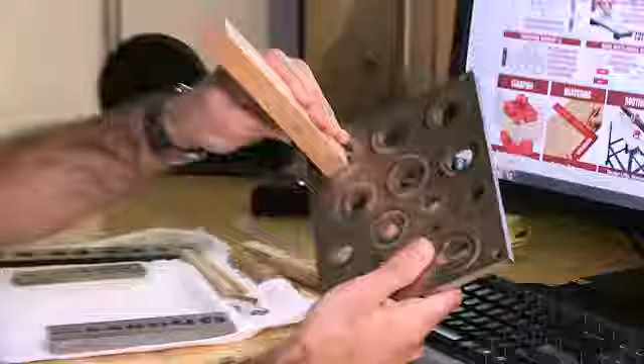So we set out to make a dowel maker. We first started off with a plate like this, to where you could start really big and work your way down to the sizes. But it's pretty difficult, you kind of need a press for that.

Mike is a great mastermind, he envisions what it should look like. So this is the first design so far, first prototype. That's kind of where we're at right now.

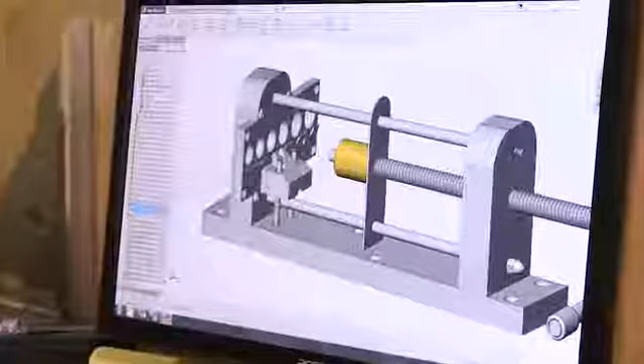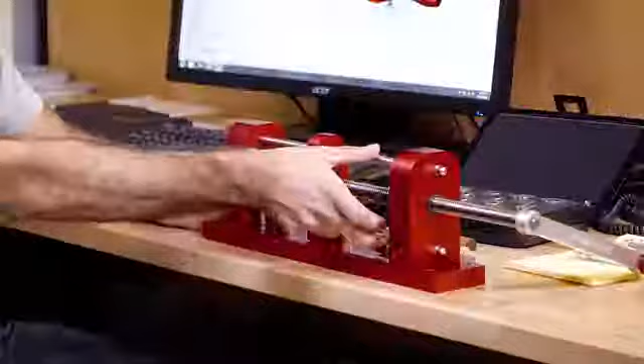I first started drafting the overall shape and geometry of the dowel press in SolidWorks. I started off with the Acme rod and eventually realized that I needed a way to stabilize it, which is where the guide rods came into play. They actually serve two purposes: holding the tension between the dowel getting pushed through the slug, and serving as a guide for the Acme rod while keeping it centered.

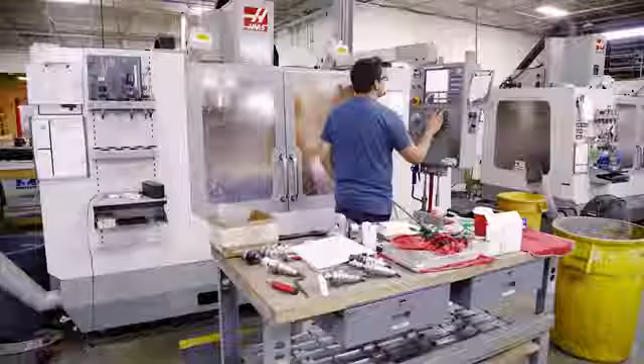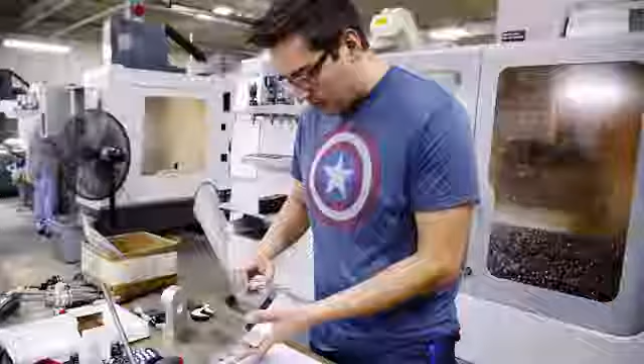So our machinist has got a couple parts done already. As you can see, these are beefy, really really hefty. You can have your Acme rod that goes through here, and that's about all we have so far.

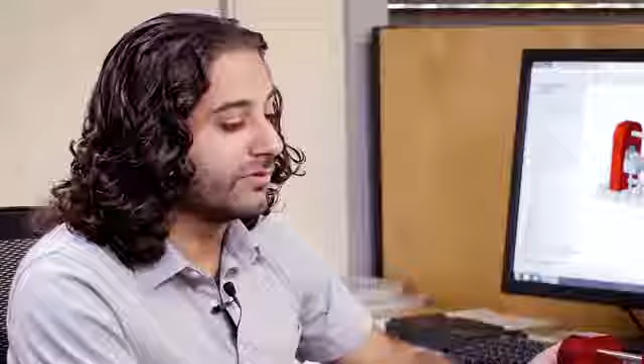After I had a draft that I was happy with, it was time for the first prototype. Alex machined all the components, and from there it led into our rigorous testing procedure.

When I first created the first prototype, I was very anxious trying to use it. What I want to see is it going to start mushrooming outwards, so that'll show that we're getting a good cut.

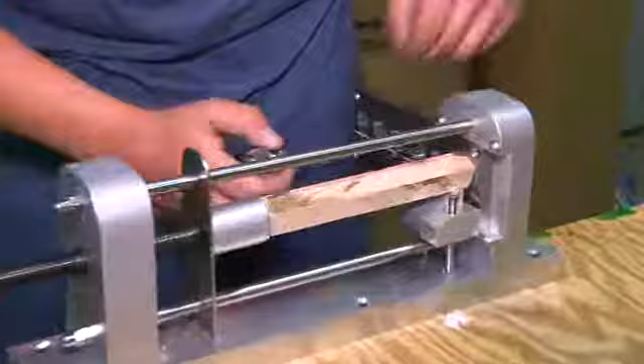One of the coolest features was a fall-away guide center. Once this pusher reaches this point, it ramps down on this slope feature, presses down, compresses the springs, and is able to finish the rest of the dowel. So you come up with a perfectly round dowel every single time.

We've been at this all day, for the past 5 hours we've been running on this. So now we're down to the last plate where our smallest diameters are at. We're at the final dowel hole, 5 millimeters, right on the dot. It's nice, that's the money maker.

Final test, here you go. Product development is a process. It takes a lot of testing, redesigning.

We wanted to have one complete tool to where you could start off with almost any size shape. It sparked the idea of using multiple plates. The dowel plate had various holes or various dowel diameters.

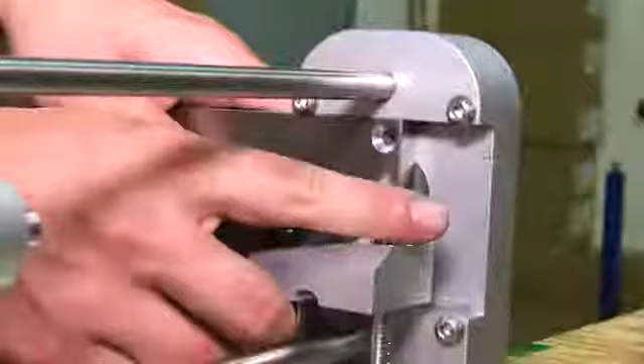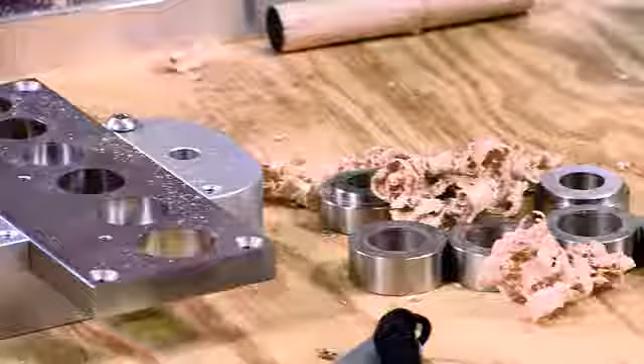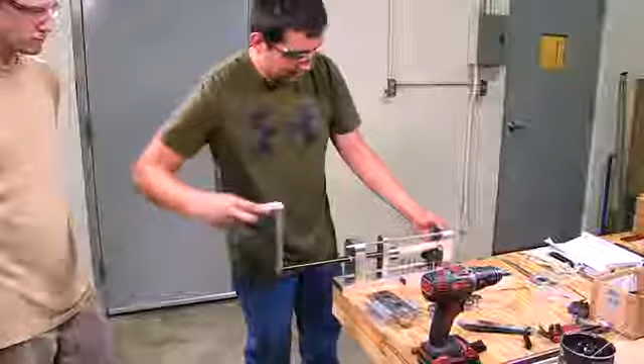The dowel plate seemed too bulky, and from there we decided to go through the bushings. We'll be testing our newly designed dowel slug, which would be replacing the traditional dowel plate in our original design. The advantage of many different slugs, to where we could come up with all the sizes, is the flexibility of making different size dowels.

Right here we were able to install it. You got your finger grooves, take the old one out, put the new one in, slides right in, easy as pie. You could replace them if you ever lost one, just buy a single bushing instead of the whole plate. The bushing seemed to be the best way to go.

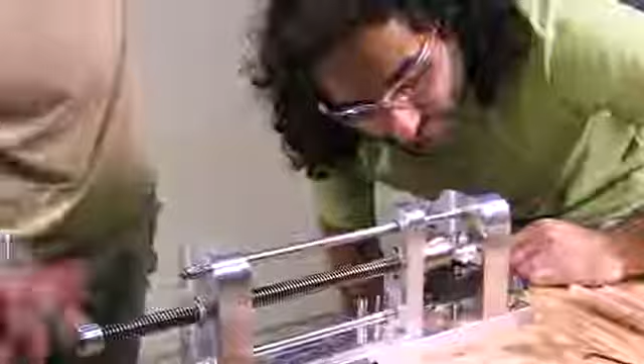In the program, could you round out that corner right there? It was a collaborative process to come up with what worked and what didn't work through testing. So make sure you go in there. Well, it doesn't have to be an end all, although I prefer it.

You know, I see myself as the tech, trying to debug things. I see myself as trying to solve the problems, getting my hands dirty, and I love getting my hands dirty. One other thing I've seen is my hand's getting worn out by this, so if you're constantly pivoting it or holding it like this, you're gonna get a blister.

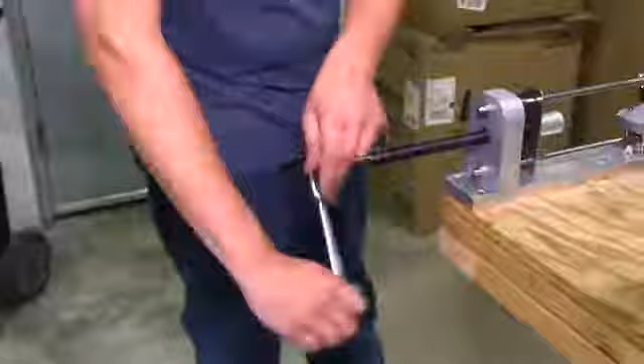We didn't have a good idea on how to create a good crank arm. So when we first designed it, it just looked like a bar, like from a press. And so we had to change it up a bit.

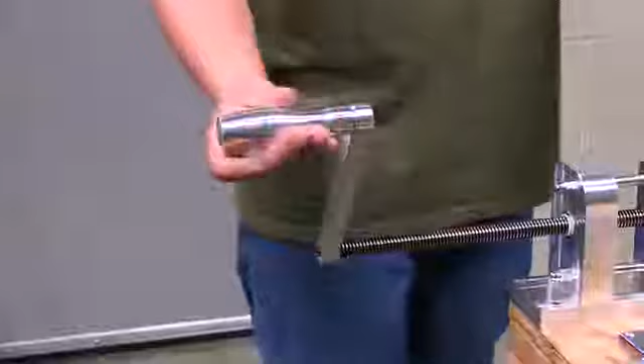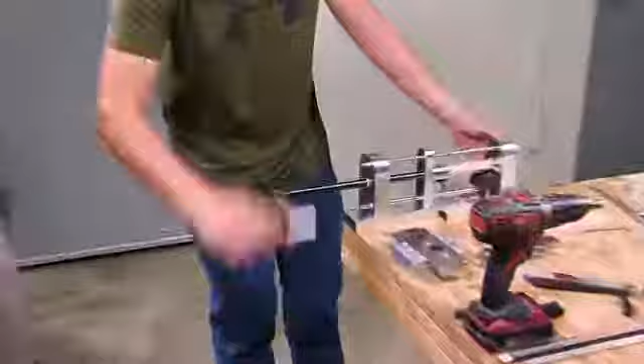The idea came to me with the crank arm, I like to mountain bike, and it came down to me being on the trail when my front chain ring broke. I started studying it more, understanding it, and I noticed it was all aluminum, and then I was like, wow, I could introduce that into the dowel press.

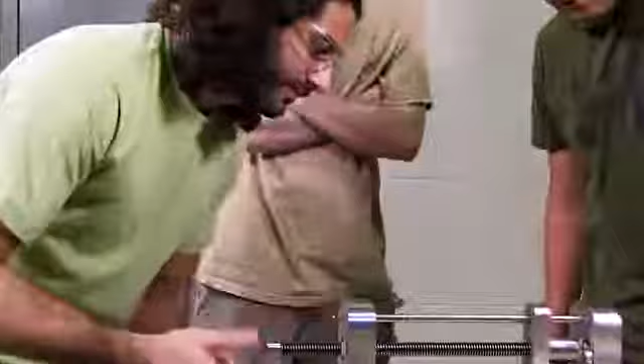Brought it up to Mike. From there, we designed it and brought it to life and started testing it out.

Still going, it's going smooth. You don't even feel it.

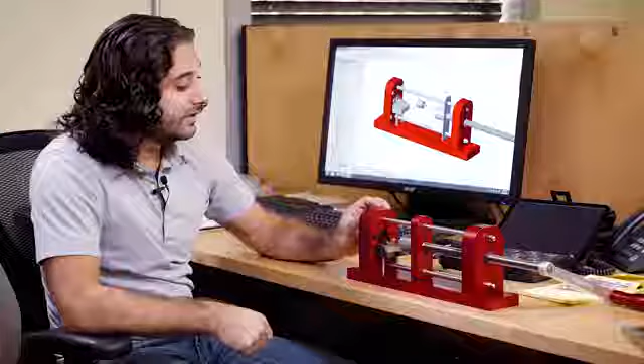This isn't your typical crank arm, it's made out of aircraft aluminum, so it's very rigid, it's strong. With the length that we have out here, you have enough torque that you don't even feel like there's much effort on here.

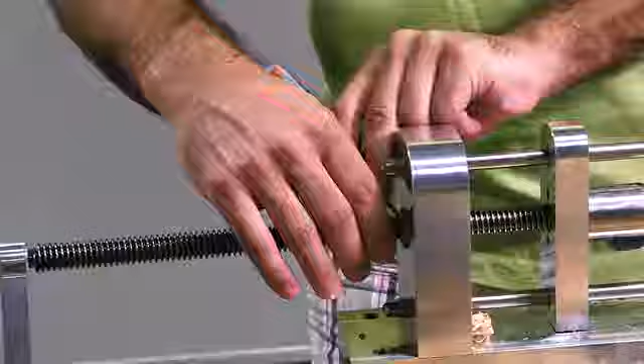There's a lot of heat buildup that we've noticed in our previous prototypes, and the way we solved that without putting grease on there—because grease and wood's not a good idea—was going with a graphite impregnated Delrin custom machined nut. It cut down on the heat, cut down on the noise, and made for a long-lasting solution to our dowel press.

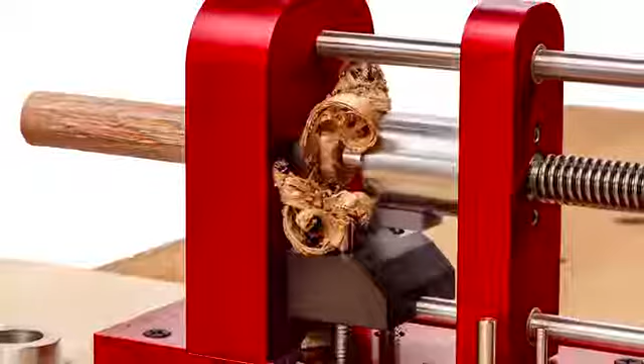The journey in developing the dowel press was eye-opening. We wanted to make sure and create a product that, as every other Woodpeckers tool, can be passed down from generation to generation. And I think we've definitely reached that with the dowel press, with this robust design.

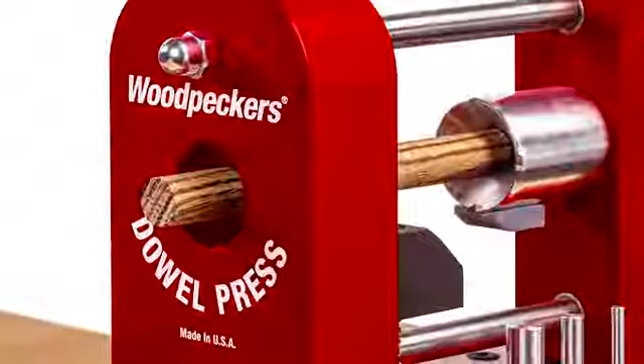Being hands-on with this tool, testing it out, creating dowels, that's the best part about my job. I'm proud of this tool, happy with the end results, and woodworkers are going to love it.